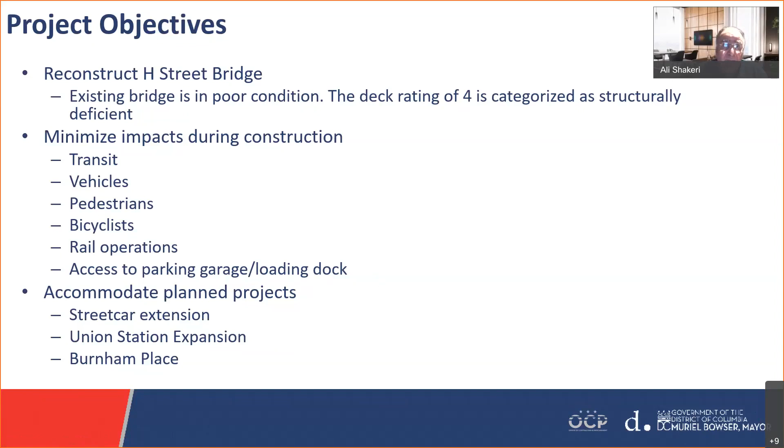Accommodate expansion of Union Station. I'm going to describe that in a little more detail. You heard from the director that Akridge has bought the air rights over the yard, and they have a huge project to build 3.2 million square feet of office and condo.

So next, let me give you a little bit of background. Again, most of you know where the H Street Bridge is. What you're looking at is an aerial photo of the bridge. From left to right, the bridge spans over First Street, then over WMATA, then over the Amtrak rail yard, and over 2nd Street. As you can see, the bridge is north of Union Station.

I want to bring to your attention, when we talk about maintaining connection to existing facilities - on the right-hand side, the Union Station garage has two ramps that connect to the bridge, and on the left-hand side, near that green building, there's a ramp that connects the bridge to the Kaiser Permanente building and provides access for Amtrak to service the Amtrak yard.

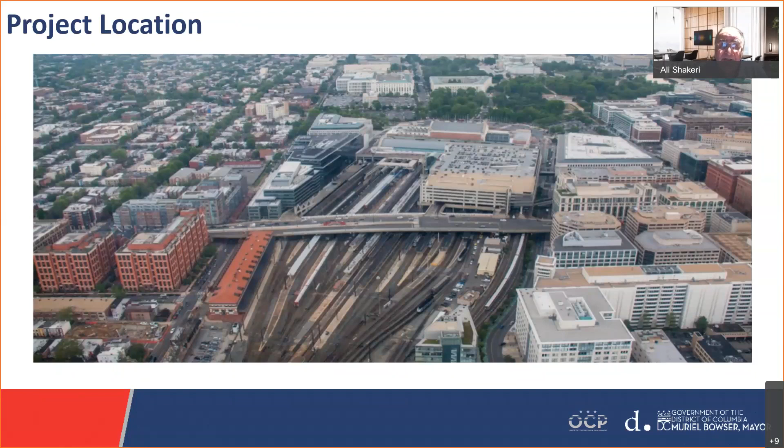This plan of the bridge shows you the limit of the project. From the left is North Capitol, then the bridge, where H Street starts, and there's an approach span that spans over First Street and WMATA, then the bridge, and on the right-hand side is 2nd Street, and then it ends at 3rd Street.

As you can see, the right-of-way changes from the approach to the middle of the bridge, and the new bridge is going to have the same right-of-way. It's going to have the same footprint as the existing bridge. One more thing - can you go back quickly?

At the bottom of the slide, we have the profile of the existing bridge. The existing bridge has 13 spans, and from left to right, from North Capitol, there's a 7% grade that takes the bridge to its top, and from there, about a 5.75% grade that takes it back down to 3rd Street.

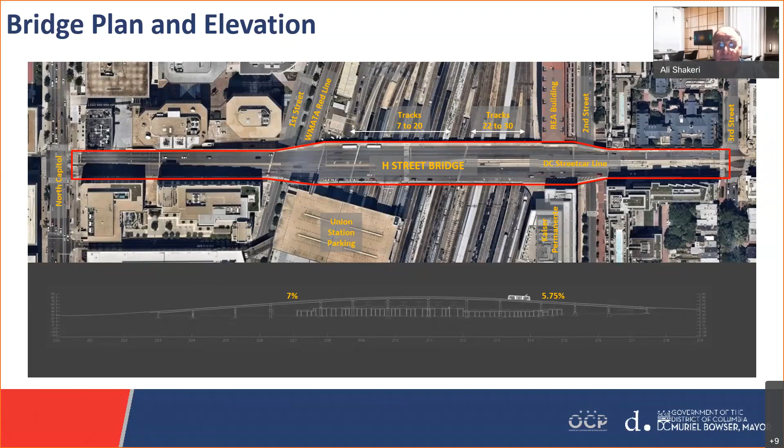Again, the profile of the bridge is going to stay the same. So as far as the right-of-way and plan of the bridge, the new bridge is going to be the same as the existing one, and the profile is going to be the same, except I'm going to describe a bit more - the span arrangement is going to be changed.

So let me give you a little bit of history. H Street used to be there in 1900, and by the Act of Congress in 1907, the air rights of H Street were provided to the rail operation. What Amtrak did - they built a number of railroad bridges to span over the old H Street. So what we call today the tunnel was actually the H Street underpass, and it was like that from 1907 until the middle of the 1970s.

H Street used to go under all the Amtrak tracks, similar to K Street, Florida - I'm sure people are familiar with those locations. Actually, the Amtrak tracks were on top of H Street.

In the middle of the 70s, they were going to build the garage that you see, the Union Station garage, and they needed access to the garage. There was some additional plan that didn't get implemented, but the garage was built, and there was an agreement between the District and Amtrak that the old H Street was going to be abandoned, and the new bridge was going to be built over all the tracks.

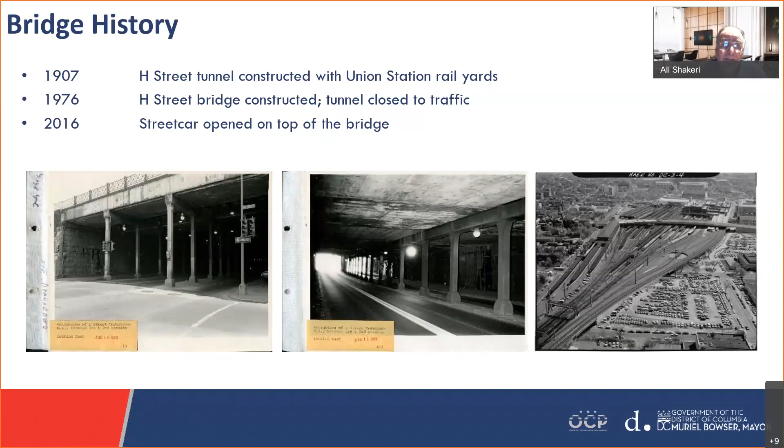Okay, so this is a plan of the existing bridge. On the top, you can see the 13 span that I was talking about. What you're going to be noticing is that the blue lines on the plan indicate the location of the Amtrak platforms, and then the location of the tracks, and the location of our piers as they exist today. On the bottom, you're going to see the profile of the bridge.

As I told you, we're going to keep in the right-of-way, and we're going to be building the new bridge in exactly the same right-of-way. As you can see on the plan, there are connections from the bridge to the garage, and on the right-hand side, a connection to the Kaiser Permanente and Amtrak loading dock.

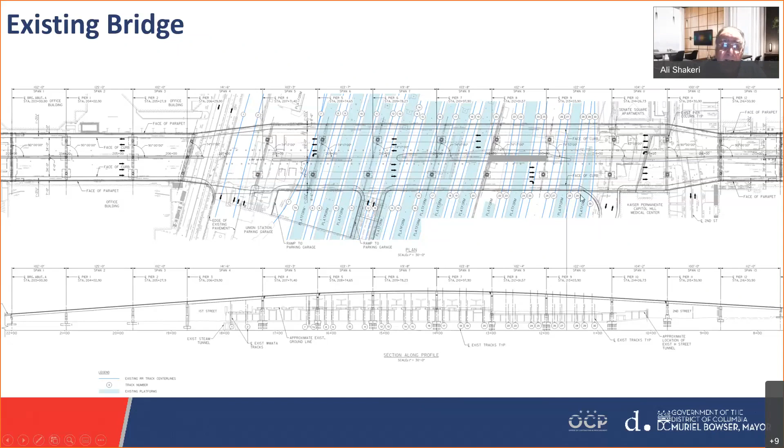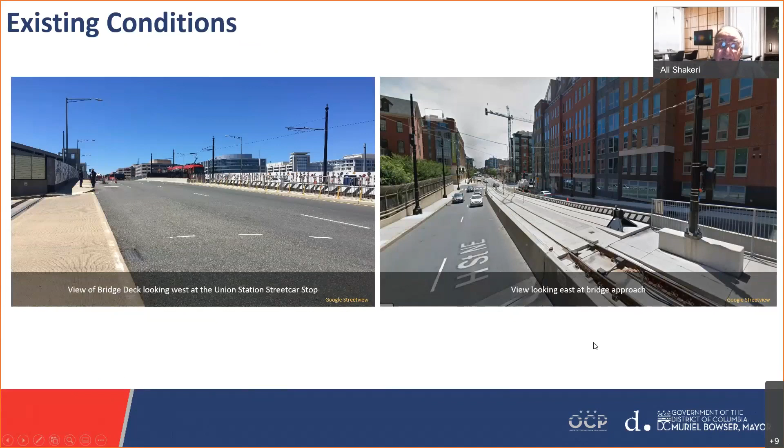Next. These are a couple of pictures from the top of the bridge. The one on the left, you are looking west, and you can see the streetcar on top of the bridge. On the right-hand side, looking east, you see the streetcar tracks that come and connect to the top of the bridge, to the station at the top of the bridge.

Okay, who are the stakeholders for these projects? Of course, first of all, Federal Highway. This is a federally funded project, even though they have a small portion of the cost, but they are participating in this. Amtrak is the biggest stakeholder, again, because the bridge footprint is going to be on top of the Amtrak yard. The Union Station, which controls the Union Station Amtrak station, owns the building, manages it, and is a big partner. Federal Railroad controls, of course, the Amtrak operation and Amtrak expansion.

The DC streetcar, WMATA, because they have tracks under our bridge. Akridge, because they have development north and south of our bridge. And then all adjacent property - there are about 8 buildings north and south of the limit of our project that are partners, and then, of course, the community. Next.

Future adjacent projects. I guess, as you heard from our director, there is a big plan for this area. So I'm just going to quickly describe who owns what and who has what plan. In this one, let's start with the blue.

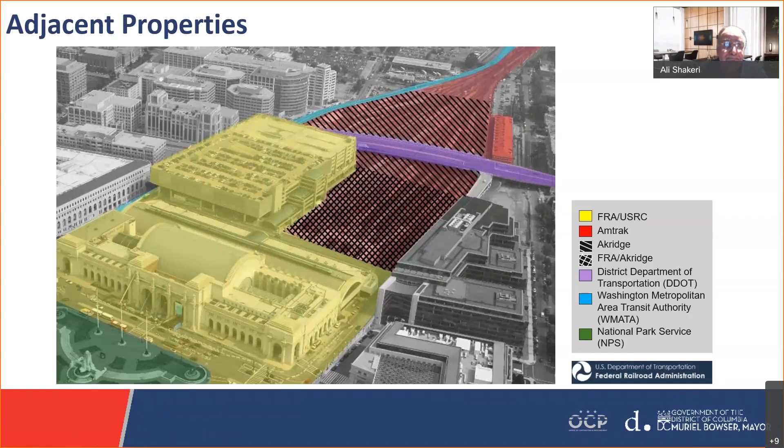One thing I want to bring to your attention is that one of our challenges is the new bridge should have such a deep foundation. When we start building the new bridge, from the bottom of the escalator below, it's all dirt, and we have to have our new foundation go down 150 to 200 feet, because in the future, when the Amtrak and Union Station expansion project comes, they're going to be excavating about another 30 feet around our foundation, and those are going to be independently standing columns that go through the whole building. So these are the major challenges that will be discussed with the design build team in detail.

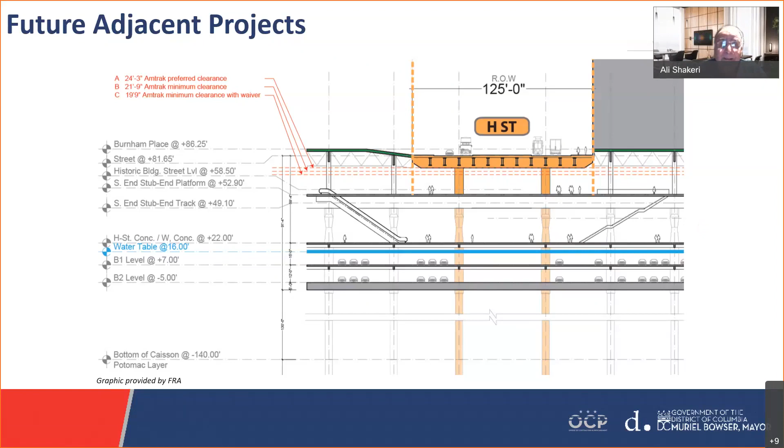Okay, the preliminary design criteria that we used for designing the bridge, of course, is DDOT standards. As I mentioned before, we're going to be replacing the bridge within the existing right-of-way, maintaining independent utilities, allowing for the streetcar station to be reconstructed on top of the bridge and extended to the other end, and maintaining traffic across the bridge at all times during construction. We're going to have one lane of traffic going east and west throughout the whole construction, and I'm going to show you the ideas we have for doing that. Of course, the design build team might improve that or adopt it.

For Amtrak, the design criteria we have to maintain are the existing vertical clearances. Some of the existing vertical clearances don't meet Amtrak design criteria, but those are grandfathered in and Amtrak is accepting them. At the same time, we have to provide horizontal clearances per Amtrak criteria. Again, the challenge is that the existing bridge has to be constructed with the existing platform, and the new bridge has to be designed such a way that it falls at a certain location, between a third and the middle of the future platform.

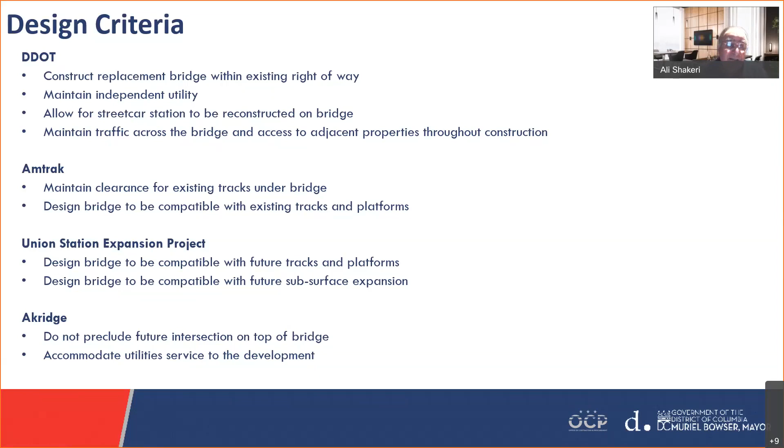The next thing is the Union Station expansion project that I just talked about. This is something between Amtrak and the USRC. At the end of it, Akridge is going to be building 3 city blocks north and south of the bridge, when the platform is provided by Amtrak to them for their building, and they need to have access to the bridge, so we need to accommodate that. And then we need to design the bridge such a way that it provides utilities for future expansion.

Now, the preliminary layout that we have done: as you can see from the plan, we actually reduced the number of spans from 13 to 9 by relocating the location of the piers. The blue hatch line shows the existing platform. It may be hard to see here, but when you get a copy of this presentation, you can zoom in and see it. On the blue line, we have existing piers; the orange line is the future platform, and the dark dots show the location of our future piers. As you can see from the profile below, we are going to maintain the same profile as the existing bridge.

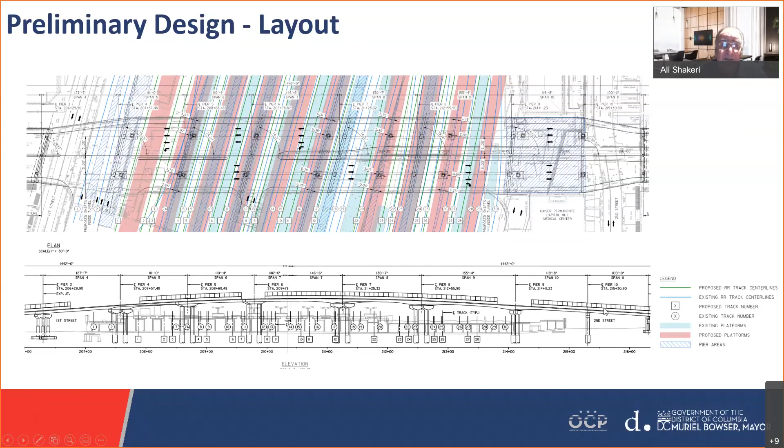So this is what, again, we have done throughout 30% design. We are proposing to have 2 hammerheads to support the bridge. The reason for 2 is that we need to demolish half of the bridge, build that half, then demolish the other half and build the other half. So we are going to be building 2 new bridges side by side, each equal to half of the existing bridge.

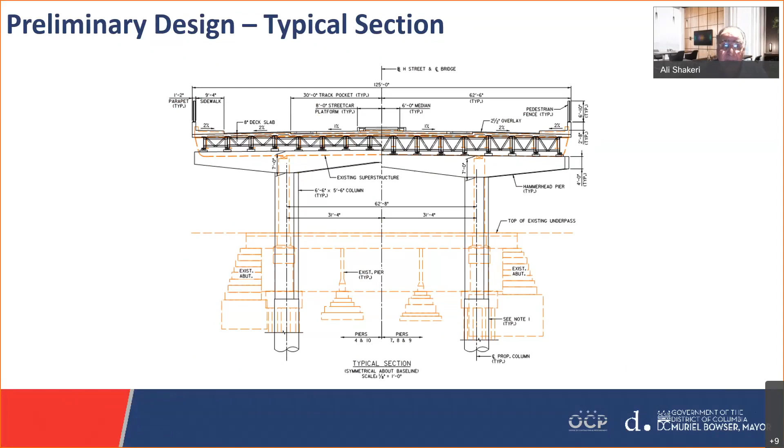One thing I want to bring to your attention is that this cross section in light orange shows the existing bridge and the Amtrak bridges, which are under the existing bridge, and the area between that is the tunnel or underpass of the H Street underpass. Next, we have a short video showing our idea about how this bridge can be reconstructed.

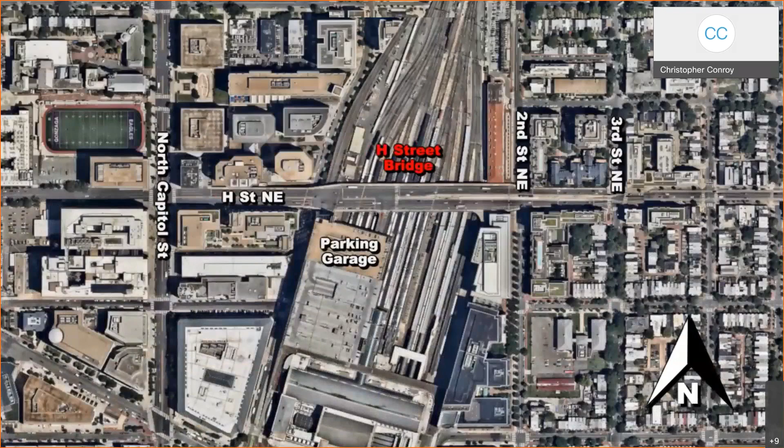The H Street Bridge, NE, also called the Hopscotch Bridge, is 2 blocks north of Washington Union Station. The bridge is a critical link for the neighborhood and local business district. It also serves the transportation hub at Union Station. The bridge connects North Capitol Street to 3rd Street. It spans over 1st Street, the Metro Red Line, the Union Station rail yard, and 2nd Street.

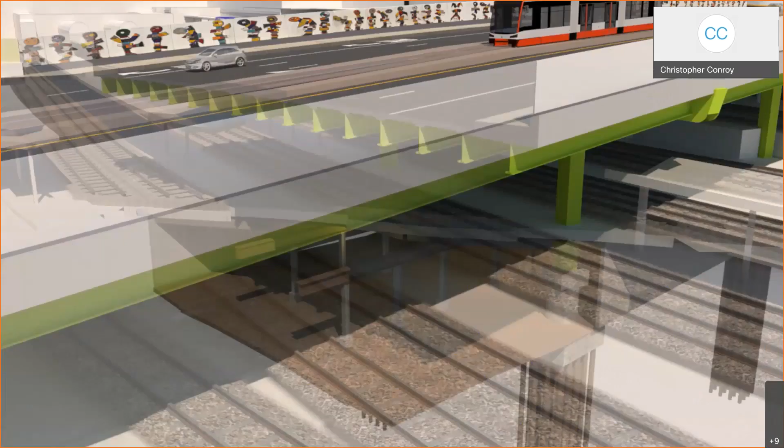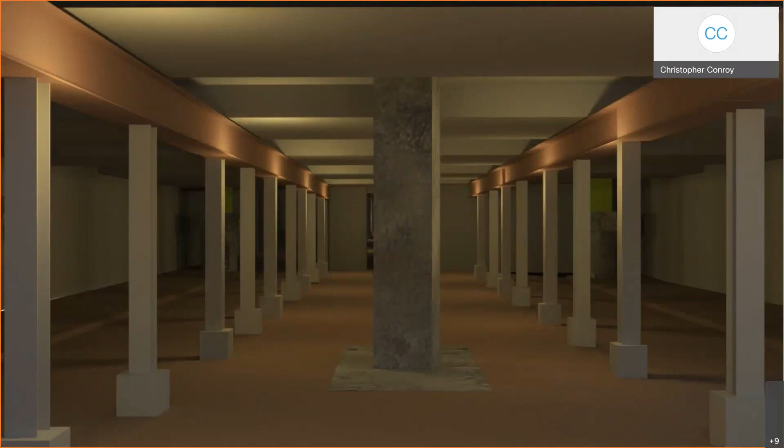Replacement of the bridge is needed to address the deteriorating deck and supports. Below the bridge and under the rail yard is the abandoned underpass of the former H Street. Vehicles used the underpass to cross under the rail yard before the bridge was constructed in the late 1970s. Foundations for the new bridge will be constructed from inside the underpass, and the contractor will use this space to store materials. Temporary support structures will then be constructed in the rail yard from within the platforms.

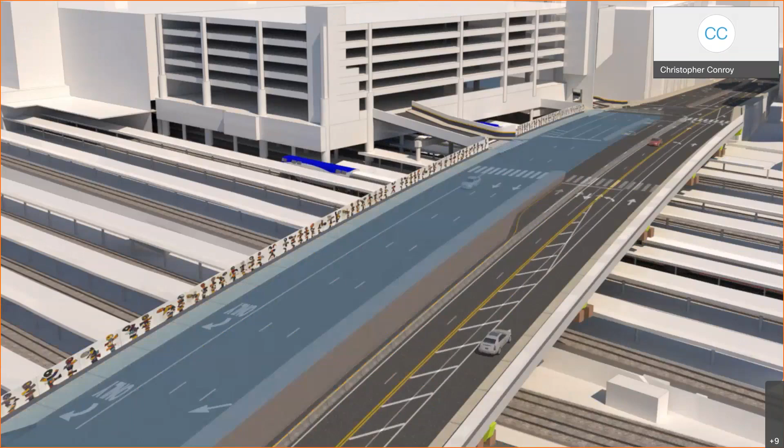The first visible signs of construction will be the change in streetcar service. It will terminate at 3rd Street, and the station on top of the bridge will close. In addition, the bus stops on the bridge will close. Next, vehicles will be restricted to a single lane in each direction on the northern half of the bridge. Access to the bus station and parking garage will be maintained during construction.

The bridge will be demolished using cranes and trucks operating on the bridge. When this occurs, trains will maintain their normal operations in and out of Union Station. Bridge support columns will be removed using cranes and trucks operating from the bridge. Old and unused foundations will be removed from within the underpass. New columns will be constructed at specific locations to support the new bridge and not interfere with rail operations.

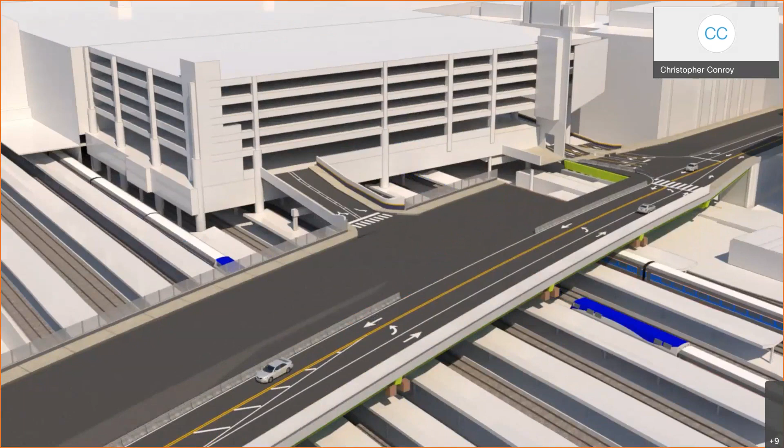Then the bridge deck construction will begin in the reverse order to demolition. Once the southern half of the bridge deck is constructed, access in and out of the bus station will be moved to the eastern ramp. At the same time, public parking access will be rerouted to the front of Union Station from Columbus Circle. Demolition and reconstruction of the western end of the bridge over the Metro Red Line and 1st Street, and the eastern end of the bridge over 2nd Street, can now begin.

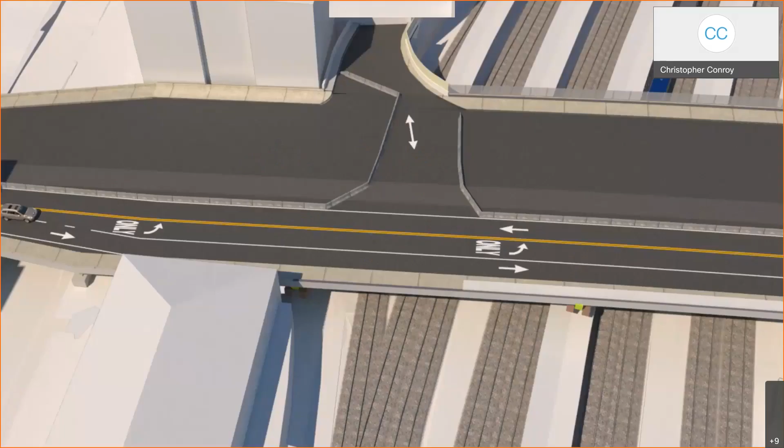Once the southern half of the bridge is complete, traffic will be moved to a single lane in each direction on the new bridge. Demolition and construction will begin on the northern half of the bridge. Railings, sidewalk, and pavement markings will be placed in their final location. Traffic will be restored to all lanes in both directions. New streetcar track and platform will be constructed along the center of the bridge, and streetcar service restored to the Union Station stop. With construction completed, the new bridge will continue to serve residents and commuters to and around Union Station for years to come.

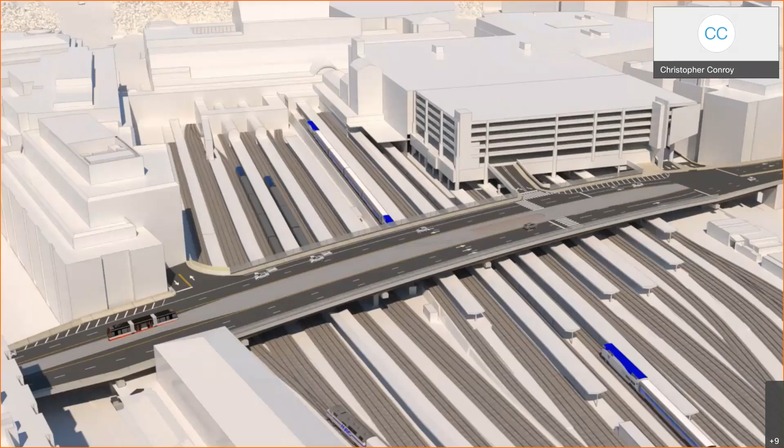So, yeah, so this was a concept of how the bridge can be built. Let me see. Okay, so sorry.

In order to get our RFQ package ready, we have completed the 30% design, and the environmental assessment is almost in the final stage of being approved by Federal Highway, and it should be completed in the next 2-3 months. 100%, everything is done. We had more than 120 meetings and coordinations with everybody from all the utilities, the stakeholders, Amtrak, USRC, Akridge, FRA. Anyway, I don't want to go through the list. So all that is completed.

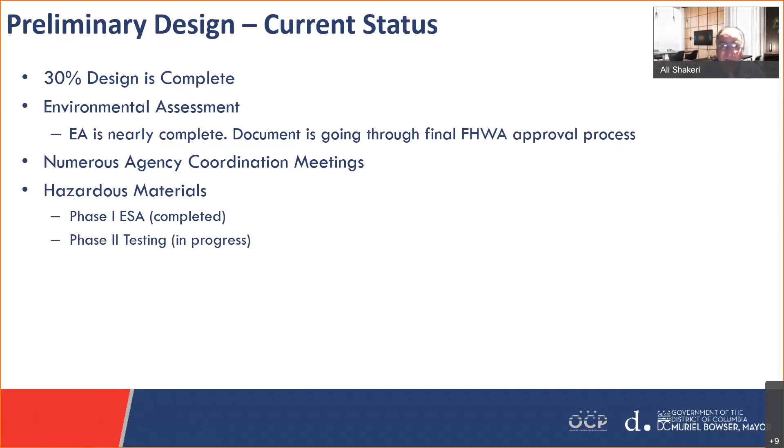And then we have completed phase 1 of hazmat, and we haven't found anything yet. Phase 2 is in progress, and we're going to include the result of that as part of the RFQ after the results are available. The technical challenges are that as far as the existing utilities, there are a lot of communication utilities that since '76 have used the underpass or tunnel for connecting their facilities, and there are some Pepco and other utilities that have facilities there.

So we have been coordinating with all of them, started more than a couple of years ago, and we identified all the utilities that need to be relocated. They're in conflict with the future bridge foundation or temporary foundation for the bridge. Almost all the utilities are identified, and as of today, they have started relocating.

Pepco is almost finished with their relocation. The communication companies, there's more than 20 of them, and they all have utilities there. Throughout coordination with us, what we decided to do together as a team is that one of the communication companies, instead of every company coming to relocate their own stuff, took the lead and is creating a multi-conduit for all the utilities, so everybody is going to move into that trench and into those conduits.

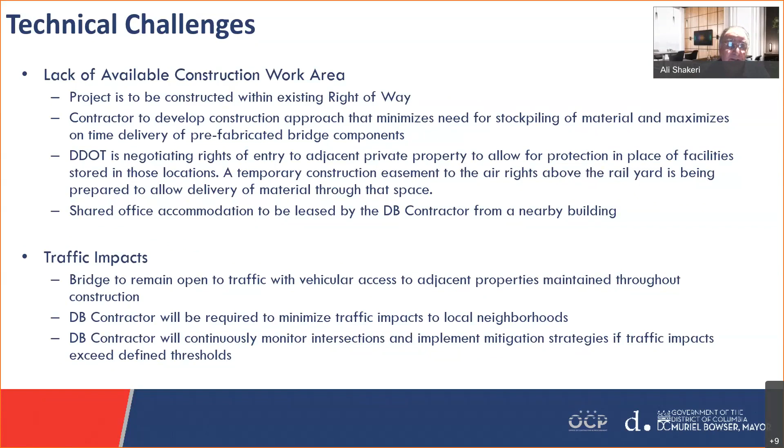Sorry. Okay, the technical challenges for the project, of course, is streetcar coordination. As I told you, the streetcar was designed and built such a way that we predicted it might not need to stop service when the bridge is under construction. So I put a turnaround when we designed the streetcar at 3rd Street, and they're going to be using that turnaround to continue operation between H and Benning.

What happens is we're going to be demolishing the bridge, so the streetcar station, tracks, and the OCS support are all going to be demolished, and the new contractor has to rebuild those. At the same time, the design-build team is responsible to certify and pass it through the DC State Safety Oversight Office before they can start operating the streetcar when we restore it on top of the bridge as part of the bridge reconstruction.

As far as the environmental aspect, as I told you, there are some commitments made in the environmental review, and the design-build team is responsible for meeting those. One of the most important things, as I mentioned, is that there are about 8 buildings next to the project where noise and vibration are going to become an issue, and the design-build team has to adopt methods and means to minimize the noise and vibration.

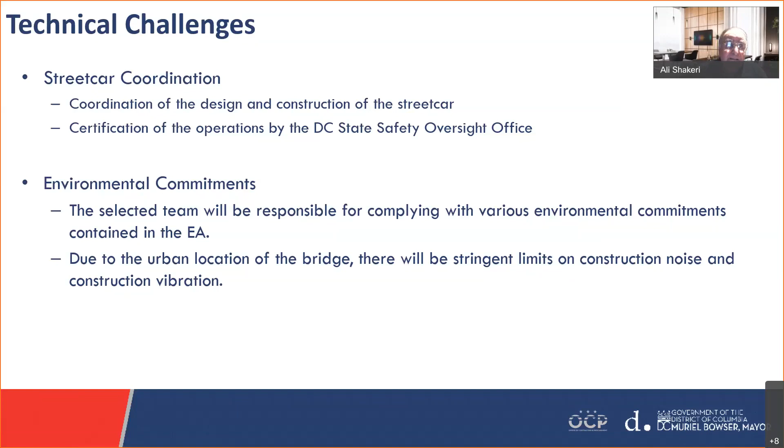Okay, great. All right. First, I apologize if there's any background noise. There are some fighter jets going overhead. If any of you have lived near a Naval Air Station, you'll understand they do practice carrier landings, and they just happen to schedule those while this is going on. So if the jets go straight overhead, I'll hit the mute button for a few seconds and let them pass.

But what I want to say is we're ready. I'm really excited about this. With the draft RFQ, we've reviewed 120 comments from 16 contractors. We now have the environmental clearances and the funding. We've reviewed and revised the request for qualifications. We are ready. Plus, when the time comes for a source selection to select at least 3 proposers, we have the resources.

And as the director noted, we have reviewed the lessons learned from South Cap, so we're good to go.

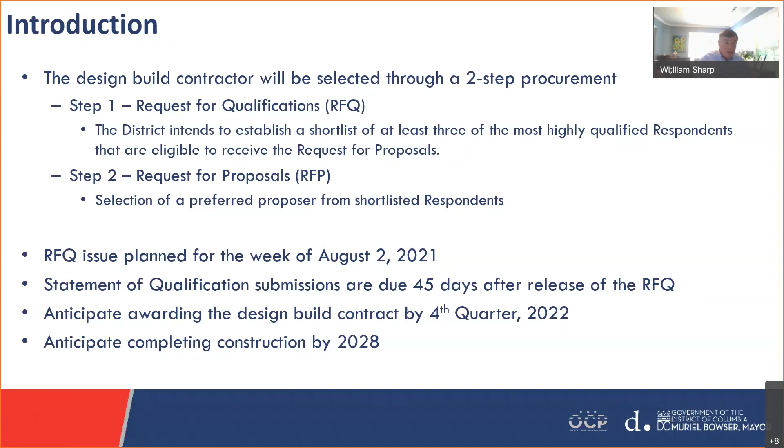Ali has outlined a number of important factors, and those will all go into this. Next slide, please.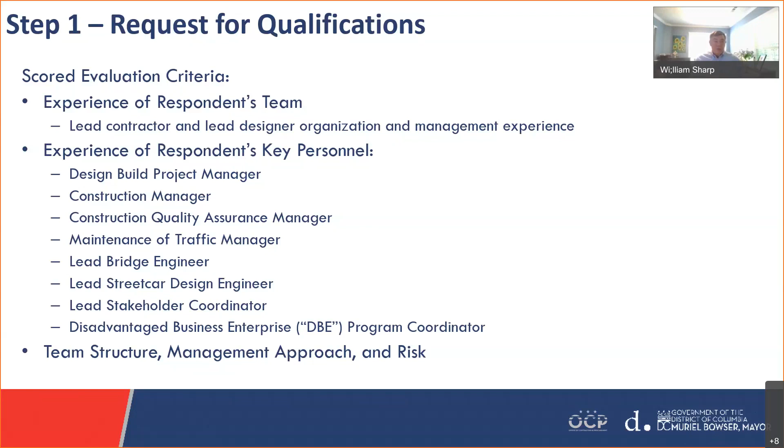So other notable items is that we'll have an opportunity for respondents to visit the H Street underpass. I think that's really, really important. We have a process for that, and we'll detail the process.

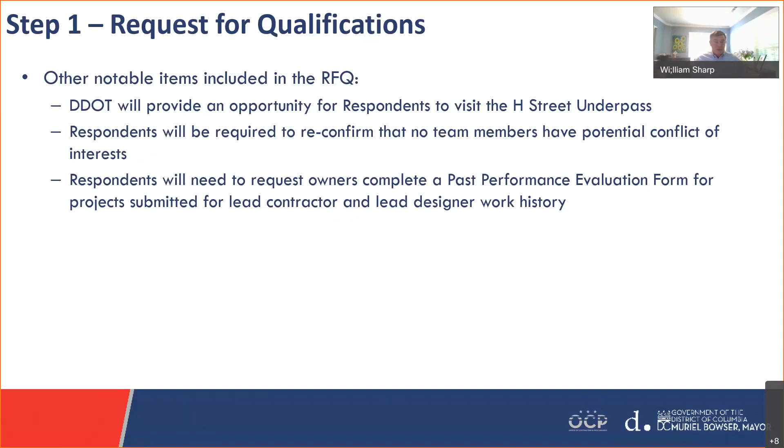Respondents early on will be required to reconfirm that no team has a potential conflict of interest. We have a team set up to review those quickly and give quick answers. And respondents will need to request other owners to complete a past performance evaluation form for the project submitted for the lead contractor and the lead designer's work history.

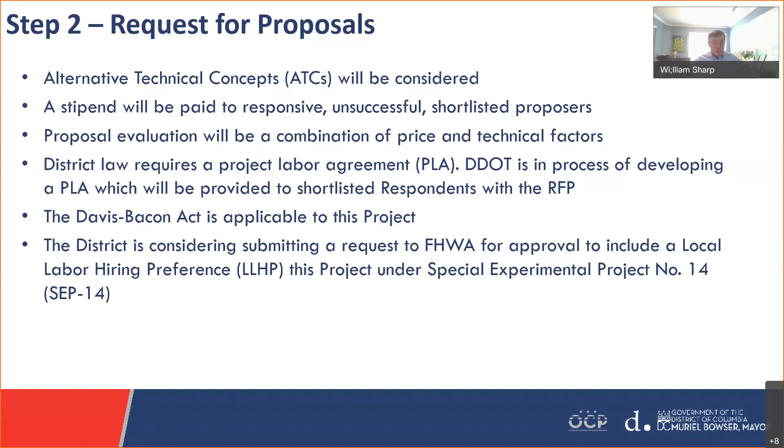Of course, the Davis-Bacon Act is applicable to this project, and the district is also considering submitting a request to Federal Highway Administration for approval to include local labor hiring preference. This project would be under SEP 14, which I'm sure most of you in the business are quite familiar with. Next slide, please.

Thank you very much. I appreciate it, and I just wanted to leave you with a message: we're ready. And thank you for your attention and participation.

So good afternoon, everyone. I hope everyone can hear me. My name is Nana Bailey Thomas, and I am DDOT's Chief Transportation Equity Inclusion Officer. As Mr. Sharp indicated, there will, of course, be DBE goals set on this project.

This is a design-build team prime contractor, so here's some important notes. The overall DBE subcontracting goal is 22.19% of the total contract value for design and construction. And as you know, that falls under 49 CFR Part 26.

A DBE utilization plan or DBE performance plan shall be submitted by shortlisted respondents in the RFP. The DBE performance plan will list anticipated work items, contract dollars for DBEs, demonstrating how the design build team will meet and or exceed the DBE goal. We really are pushing to exceed DBE goals.

We do not want requests to reduce goals and necessarily self-perform, so please make sure you have a very active and complete DBE plan. The DBE performance plan must be approved by DDOT's DBE program, that is myself and Andrea Jackson, as part of the proposal throughout the life of the project.

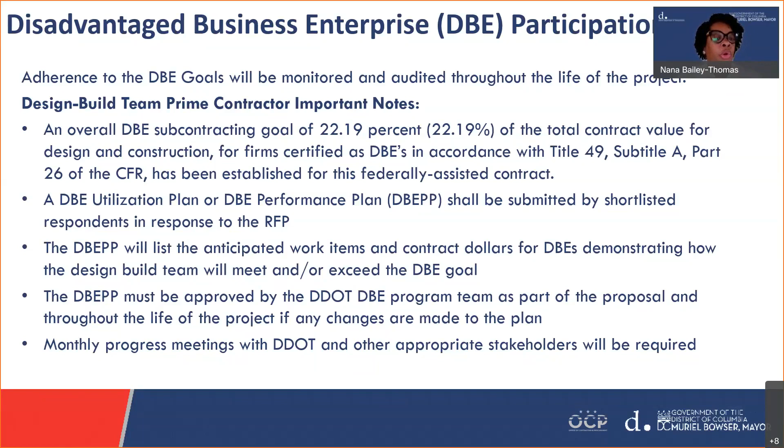So if there are any changes that are going to be made, you have to ensure that those changes go through my office and are approved ahead of time. Monthly progress meetings will be required with DDOT staff and appropriate stakeholders. Next slide, please.

Please make sure that you're proposing services within your firm's certified NAICS codes. If you need additional NAICS codes added, you will have to submit an application to our office. We are asking that you not wait. If you're seeking additional NAICS codes or seeking to be DBE certified, start submitting that application now. It will take at least 60 days, so it's important to start submitting your plans and NAICS codes now. As many of you know, the Washington Metropolitan Unified Certification Program is a committee comprised of my office, as well as WMATA.

If selected to perform on a contract, please understand that no substitutions or terminations of DBE firms can be considered unless prior approval by my office. If you have any questions or concerns, you can... I'm sorry, next slide.

Also keep in mind the on-the-job training program, which helps minorities, women, and disadvantaged individuals enter the highway construction industry, will also be a necessity. We are going to ask that those goals be identified in your plan. The design scope will have at least 6 trainees for internship and OJT opportunities totaling 10,000 hours. We definitely want you to meet that goal, but it would be great if you could exceed it. For the construction of the project, 30 trainees are required in various trade classifications, with 6 trainees assigned to the federal highway funded DDOT pipeline training program.

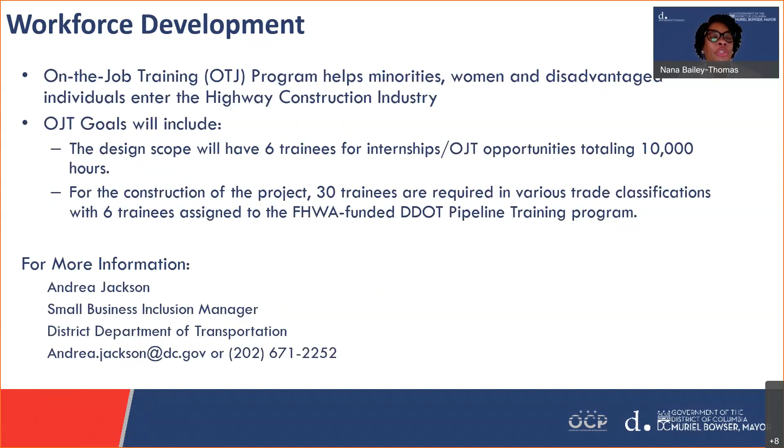Sharp, did you want to add concluding remarks or? Okay, so if not...

What we're going to do is this: as you heard from the beginning, this presentation is recorded, and we're going to be providing that on our bridge website, which is www.hstreetproject.com, all one word. Then you can go to that website. There might be a lot of valuable information there that we can provide to you.

The RFQ is going to be posted and become available at DTAB. So again, the address is there, and you guys can take a picture of it instead of writing it down, and then you can go to DTAB and get a copy of the RFQ.

Then if anybody has any questions, we're not going to be doing question and answer as part of this presentation. Any question, whatever it is regarding the project, even technical questions, please send them to the Office of Procurement at H Street Bridge Procurement at dc.gov. Our team together will look at the questions and respond to those questions to everybody, so everybody knows the answer.